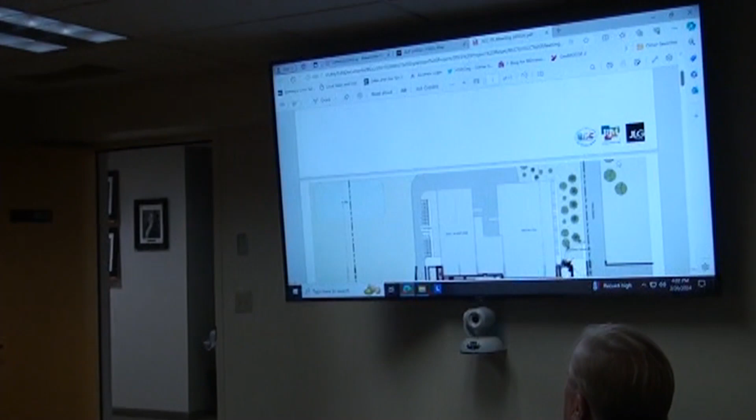Marty, is there a PDF you can scroll through? Okay, perfect. So the first thing we'll talk about is the site plan. Let's zoom out just a smidge here.

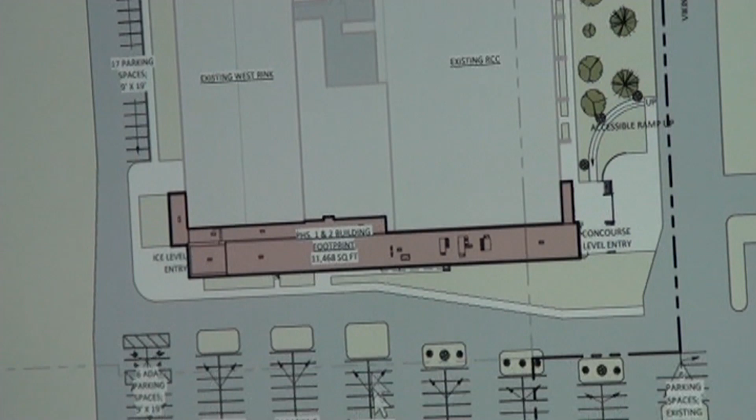So this is the extent of the site plan work that will be bid out in phase one. Previously, we were including all of the additional parking on this west side, which isn't really required by city code until we add the additional space of the third ice sheet. So we took a step back and said there's a lot of nice parking out there right now, it's in pretty good shape, and let's see if we can save some money or defer the cost of that additional parking to the future phase and retain as much of that parking that's there right now.

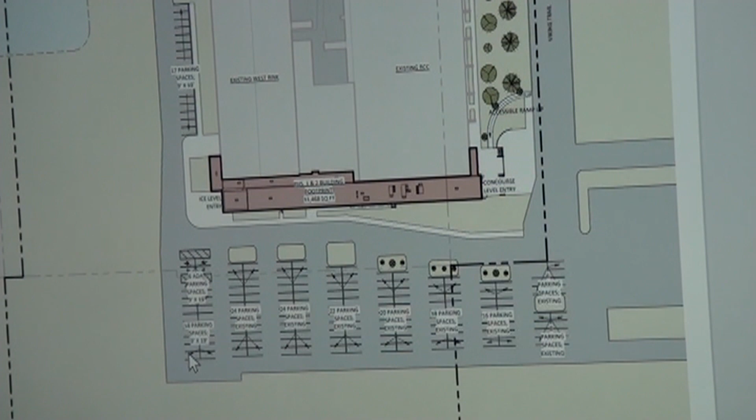So with that, some additional asphalt along the west side, some additional parking stalls over here. You can see the white is new sidewalk and site paving. And then there's some additional utilities that are going to be addressed with this.

We are going to loop in the water main, so we'll get that full loop completed. And then we also need to build out the whole stormwater retention basin to its size for the full build out. In phase one, just sequentially with construction, that makes a lot more sense.

So that parking on the left side up there, Vinny, that's all storage stuff there now, isn't it? Yeah. So you can see it is held off the building a little ways.

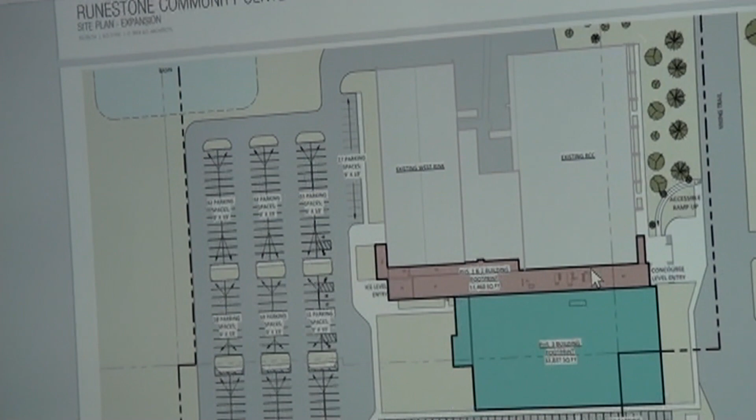When I go to the full build-out site plan, Roger, you can see here's kind of the full build-out, and I'll point out this hasn't been updated since the land swap has more or less been finalized. We have a layout that runs the parking aisles east-west and supports people coming in from the west off of 82. With that storage stuff, they have to find a different place to put that all then, or is?

Yeah, so one of the things we're doing is leaving some buffer space up here in this corner where you could build out large storage facilities in the future. Something like 2,000 square feet, a couple overhead doors, so his crew can keep stuff tucked away and not have to sit out there.

So that's kind of the long-term picture. But here you can see the phase 3 piece coming in the future, and then at that time we'd revise that south parking, and this would be the full build out.

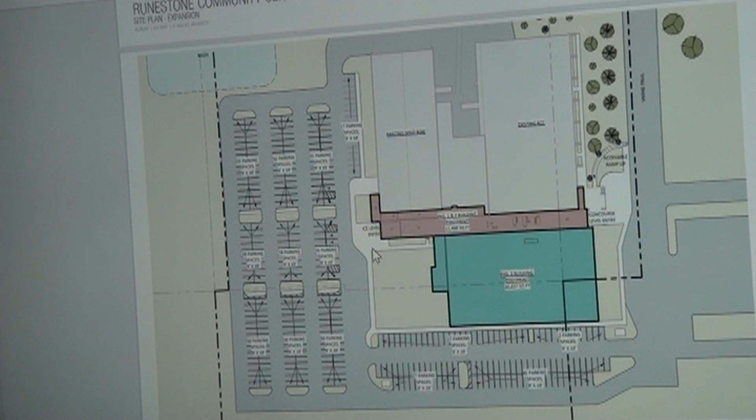How big does the stormwater retention pond have to be? Off the top of my head, I don't know the answer to that — it's civil engineering, they get into the nitty gritty. It just looks like the size of an outdoor rink. Yeah, just saying. The other thing too, I don't believe it's intended to be a wet pond. Like what's out there now, it'll detain that water when the rain event comes, and it'll slowly discharge and help control the rate of discharge.

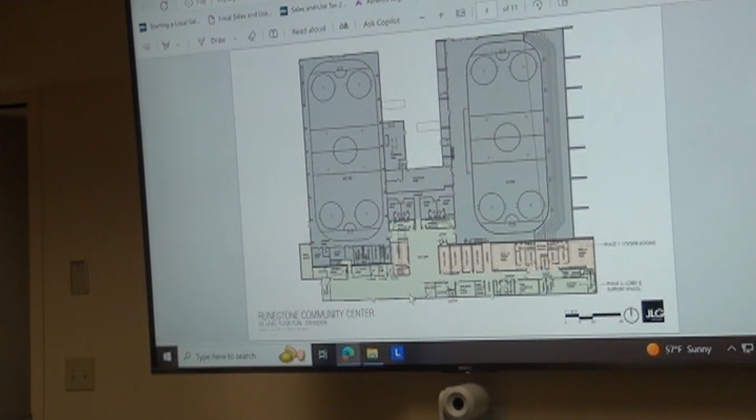So that's the extent of the site, and then when we get to the building, overall the general layout is still as it has been, with the main entry to the west.

Zoom that in a little bit, just focus on that. Oh yeah, yep, that's a good point, Marty. Yeah, we can dial this in here.

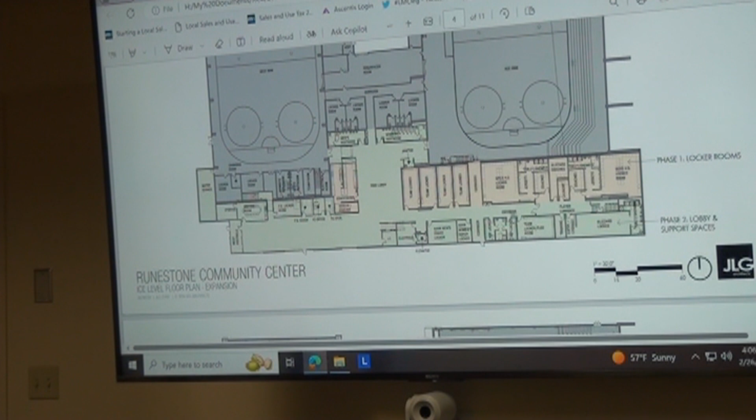So, main entry to the west, renovated locker rooms underneath that existing RCC concourse, and then the new expanded locker room in the corridor, the new lobby space, new concessions, space for figure skating.

But a couple of highlights on this plan in terms of things that have changed. Initially we were doing a lot of renovation work on the south end of the west rink, and we basically pulled that out of the project. We said there's bathrooms there, they're functioning, and there's significant dollars we can save by pulling that out. That's something that could get new finishes down the road after this work is complete, and it wouldn't really have a significant impact necessarily.

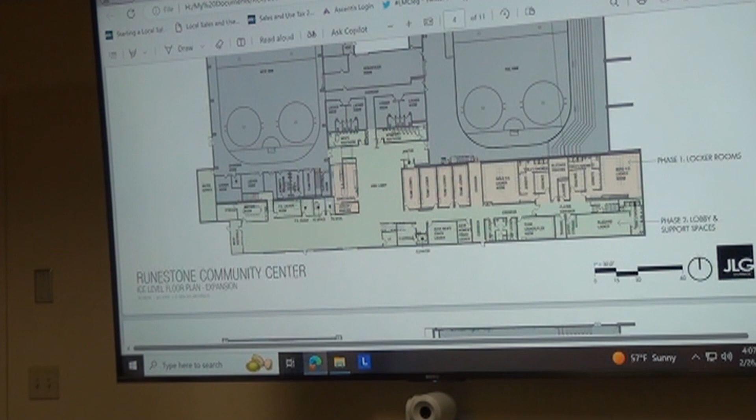But we are including the renovation and expansion of those existing lobby bathrooms. With the new lobby, those are going to be used quite heavily. In their current state they need some attention, as well as expanding. We are setting this up to support users when that third rink comes online in terms of the quantity of building occupants, so we are increasing the number of stalls with this work.

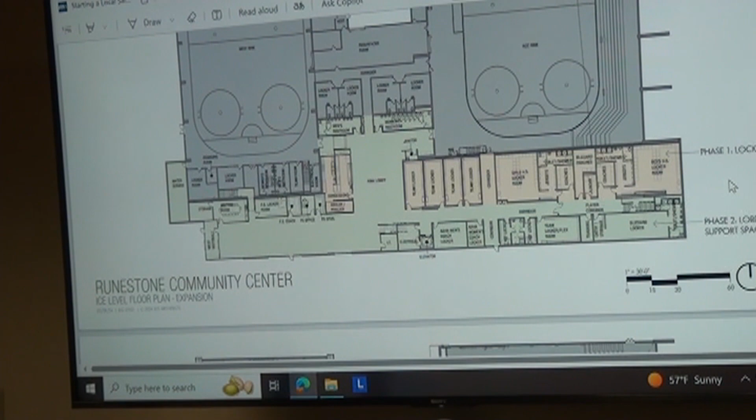Any questions on this level? You want to talk a little bit about the new service room on the west side, and the meeting room relocation that was done? Yeah, so the first thing, as I've already mentioned, was a new water service room over on this west end. Right now the water and the electric come into the RCC somewhere in this vicinity.

We really can't leave those utilities locked within the center of the building. You want those on an outside wall. If anything happens in the future, you've got access to those. That's really where they should be located.

So as we loop that water main around the building back to 82, we're creating a new water service room over on this west end. That'll bring a new water service, sprinkler riser, all that good stuff, and then that'll backfeed all the existing plumbing that's staying in the building. It'll feed the new plumbing, if you will.

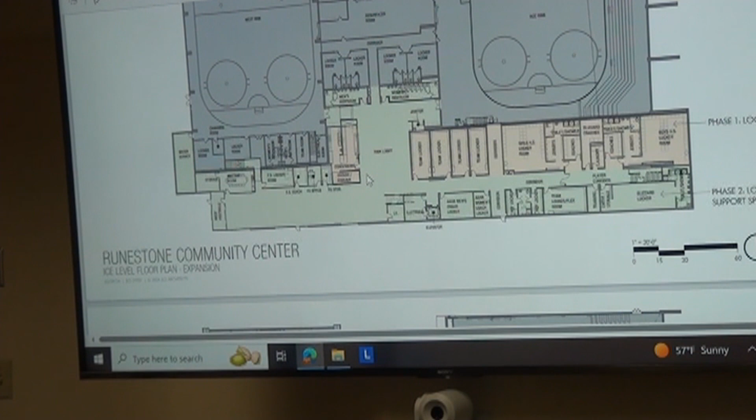When I get to the second floor, you'll see where we had some additional renovations on the RCC side at that concourse level. We pulled scope out of there, and part of that was getting some meeting room space in down on this main level near the entry. So if there's groups with the city that need to meet out there with Vinny and staff, they can use that. That could be a tournament or event headquarters, a dry land event, food show. People check in there. It's really a multi-purpose room that can serve a lot of functions.

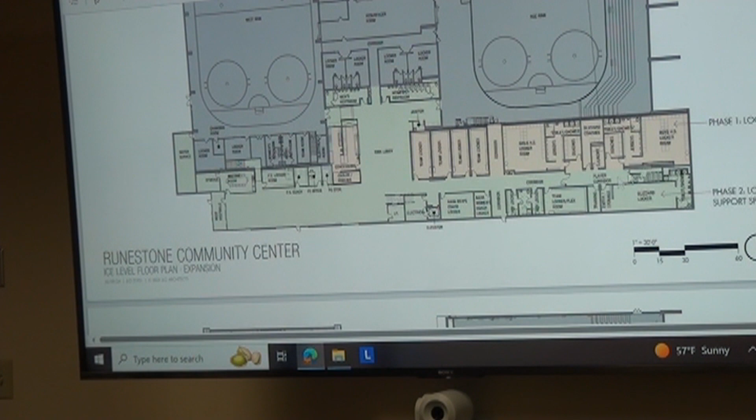And we did add a nice storage room to that, so it allows you to be flexible with furniture changeout if you want rows of chairs versus tables and chairs. Gives you some flexibility. So that area then, if we're not gonna fix those bathrooms and that...

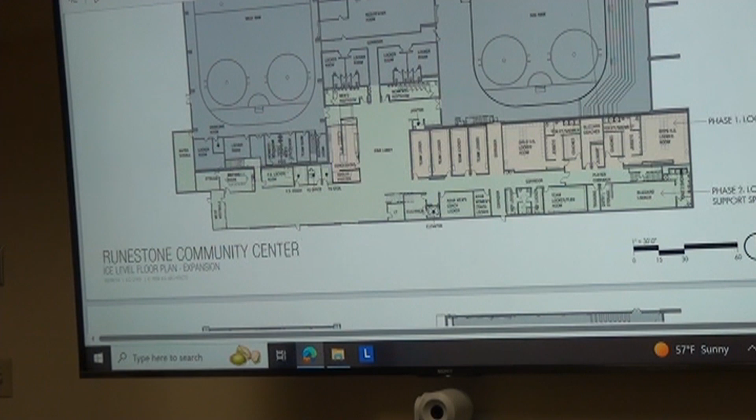Is it gonna be a wash doing it now or later? We're not doubling the cost to do it later? I would agree with that. I don't know if I'd say no additional cost. It's always gonna cost more in the future, right? But with bringing the water over here, you're not gonna be tearing up new work to do those enhancements in the future. That's some of the push and pulls we have to do because of budget.

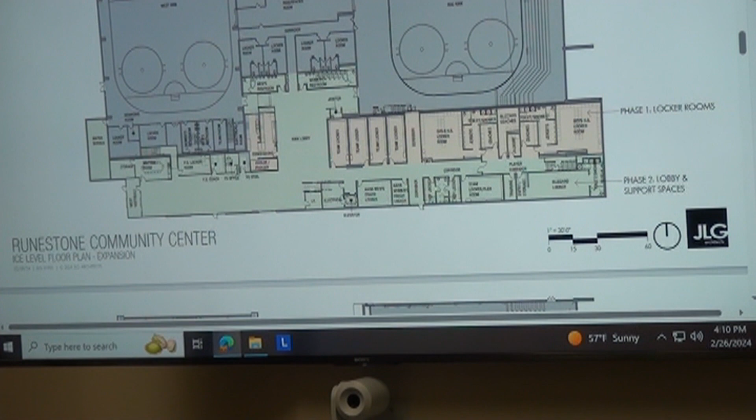And comment out, maybe - I don't want to say this wrong - by adding the toilet space and the fixtures in the lobby bathrooms, we're setting it up so when we do add phase 3, we don't have to add additional bathrooms. Our counts will still be okay.

So the bathrooms in the west rink and in the main level of the RCC that we're not going to touch now, we're not going to be triggered to be forced to do them in the future. It can be at a time whenever the city decides you need to get them done. As we went through this process, the team just said we don't have to do these, and if we're trying to save scope and save dollars, let's pull those out.

So we don't need that for the count? No, correct. The lobby bathrooms will still be there, still function, and go toward the count. But those lobby ones will have a significant increase in the number of fixtures, and that will be the main one that gets used.

The other big move here is really, if you look at it, we eliminated the work in the existing west rink and in the upper level, so we don't have piecemeal stuff all around the building. Psychologically, as contractors bid it, they see their scope of work is in one area, and you tend to get better pricing because they're not worried about the what-ifs over these one-off little remodels and where they're going to get burned. So I think it makes sense from that standpoint, keeping the project clean for the bid.

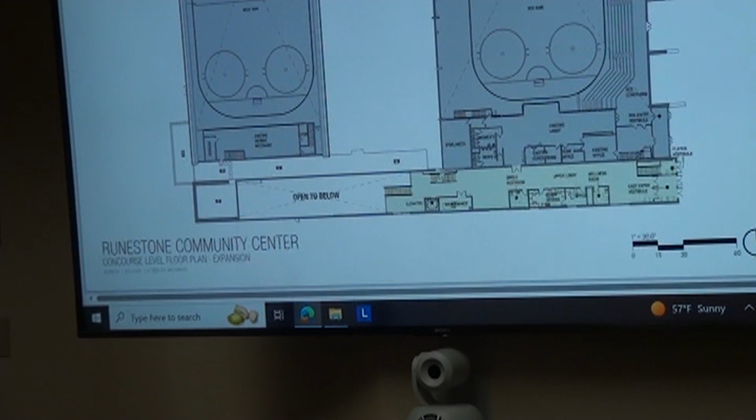So if we move to the concourse level, like Marty was just mentioning, originally at the previous design development phase, we had a bunch of renovation work happening in here. We were making these 2 bathrooms into 4 bathrooms, putting in a meeting room over here, and doing a bunch of new finishes and other renovation work.

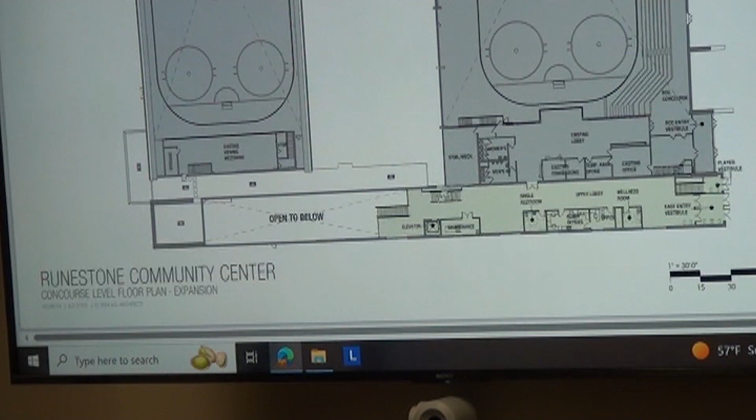So that scope has been pulled out, but our team and engineers are putting in the necessary infrastructure, so if you did want to do that in the future, you'll be able to. The size of the plumbing piping coming to feed these bathrooms will be sized so you could put those 4 back in there without tearing a bunch of stuff off. Same with the HVAC side, the air handling - we've been trying to plan that and set you guys up, so you're not going to rip out a bunch of new work if you want to do that.

Before, we had a large open circulation space in here, and we revisited that and said let's put that meeting room down by the entry, so we've got some space here we could program out.

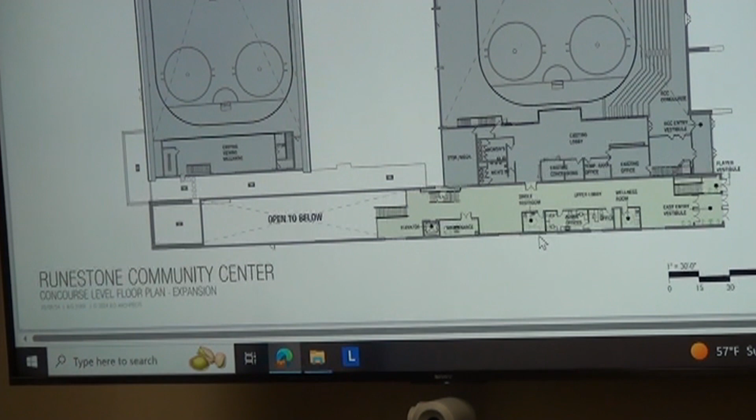So we've got Vinny and his team staff offices in this location, a single user restroom that's code required, admin offices, and the rink manager's office. Then we've got a mother's or wellness room, for all the different needs people might have to be away from lots of activity and noise, which we all know about if you've been out there, like last weekend there was a lot of activity.

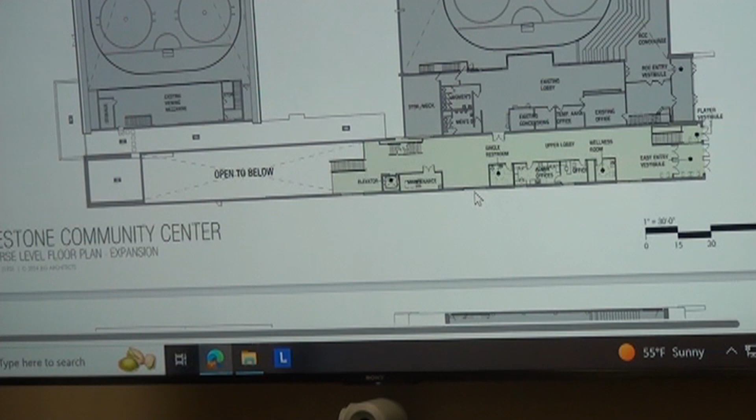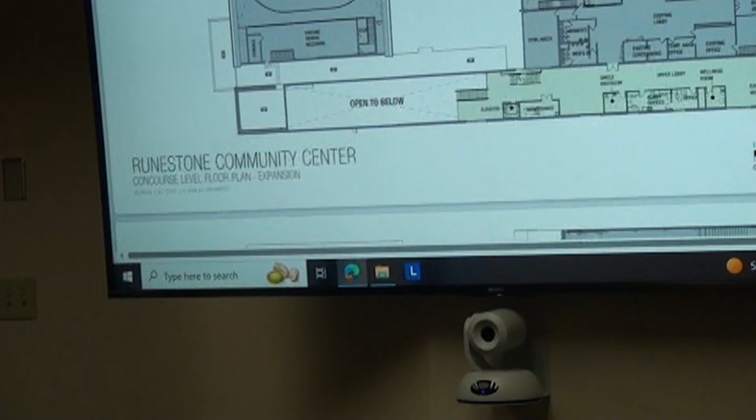That's the concourse level, open to below to the lower entry. In the previous design development, when this was being designed to meet B3, we had a completely different air handling, heating, ventilation, and cooling system, with mechanical rooms on this end and on this end on the upper floors. With the cost savings of removing that, we were able to go to a much more economical heating and cooling system that didn't need equipment indoors, so we were able to pull some space out of the building and reduce the envelope.

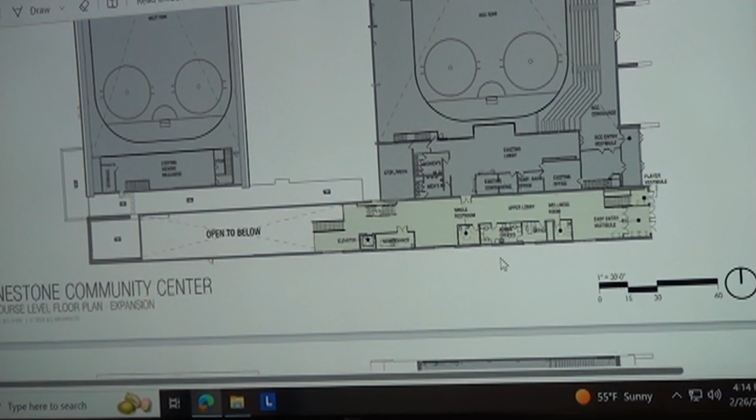If we go to the next plan, this would be the uppermost mezzanine level. You can see the stairs as they work their way up from the ice level, and then we've got the new elevator that would go from the ice level up to this highest level. This whole area is about 4,200 to 4,600 square feet.

We are bidding that as an alternate bid to the contractors, so the base bid will not include that floor or its finishes. That seemed like something where, if push comes to shove and we really need to hit a number, we get a price on that piece and you can take it or leave it on bid day.

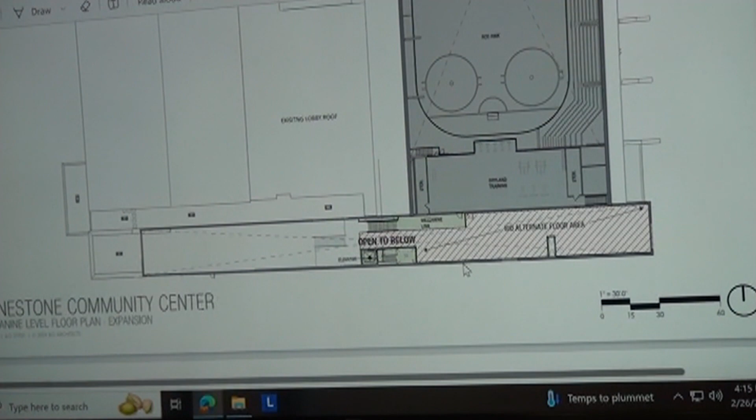What would be there if you don't put it in? Great question. If that wouldn't go in, this would all just be open two-story height. But the elevator would be stubbed out up to that third floor, and the structural members that would support that floor would also go in. So it would be a matter of coming in and adding the floor deck, concrete, and finishes in the future if you wanted to add that back in.

So we're trying to have some levers to pull to help control costs and give you options. As we looked at this, that mass is being built anyways all the way up to the top. As the team looked at it, and as Adam noted, thinking of the potential programming in the future we've talked about for health and wellness, if the bids are great and we can do the alternate, fantastic. If not, we're in position in the future to almost double that dry land training area that's up there now, with different possibilities to use space we're already building.

So what would be the intent of us using that if we do put it there? Right now there's a couple of shooting bays up there and some very primitive cardio and weight equipment. There are a few options: you can upgrade that area for dryland training, for shooting, or for a group of figure skaters to go up there to stretch or whatever it may be. You could potentially move more weights in there. There's been some discussion about physical therapy in the future, perhaps leased out space.

Once you have an elevator in there, this could be a potential for that as well. Way back when, we had that phase 4 that could be meeting rooms on the lower level and a wellness area on the second level. If you build this entire thing out and visualize it as a wide open space, you maybe can accomplish everything you need in the future without the additional space you'd have to contemplate, which is brand new two-level square footage.

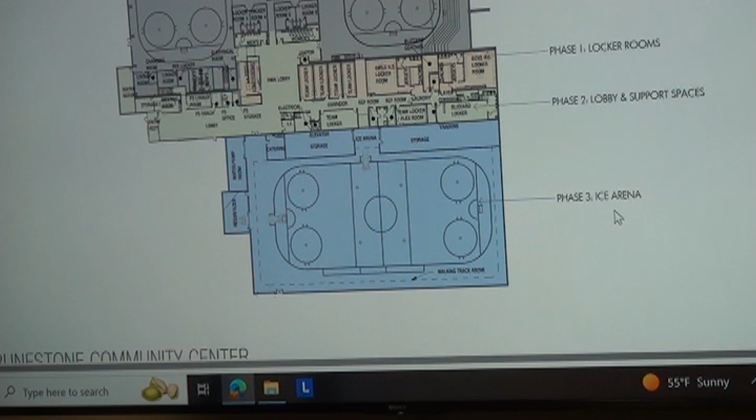Let's see here, and then we can include the preliminary plan for the phase 3 ice piece. We were about 30-40% through design development on this one when we got the budget for phase 1 and 2. So we've kind of put this on hold, and once 1 and 2 get out to bid, our team is going to shift focus back to this component and take it through the rest of design development.

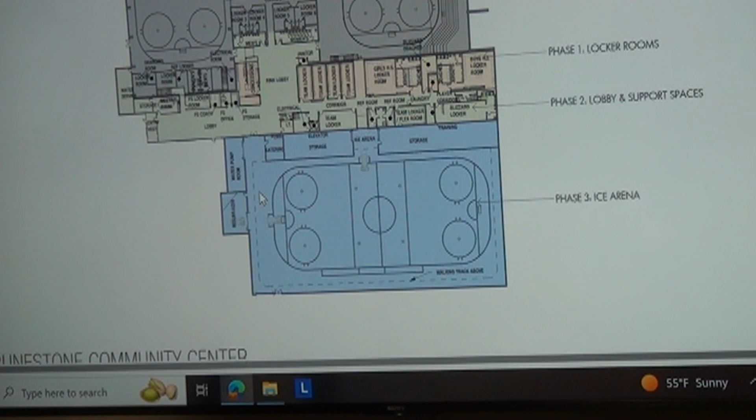We've done a little bit of work looking at - like Marty said - with some of the shifts we made in phase 1 and 2, we don't anticipate the need for that big phase 4, which allows some opportunity to get a resurfacing room in a better location right off the end of the ice sheet. We're also anticipating, with using state funding and needing to meet B3 requirements, having a pump room, and still likely having a geothermal system on site along with some other renewables and energy-conscious decisions.

If you're going to do geothermal, it's got to come one way or the other around that building, off from 82. So right now the anticipation is that there'd likely be a well field to the west.

So you're anticipating putting a well field in versus working with AOP? Correct - I think generally the requirements ask for on-site strategies. I'm not sure if we can borrow and swap, or what you're getting at. Well, AOP is an entity of the city. Right, but it specifically says on-site. Well, it's coming up - but even where we're at today, we did have a preliminary scoping study done by a third party that specializes in geothermal design.

That came back very favorable - there are likely 2 or 3 different systems we could put in there with varying degrees in the number of wells and the depth of wells. So as we wrap this up and pick back up on phase 3, we're going to be digging into that.

So does this fall under a scenario where you'd have to go for a variance to put the well in? The wells - AOP isn't going to allow any wells to go in. There's a lot to unpack. Yep, there's a lot to unpack.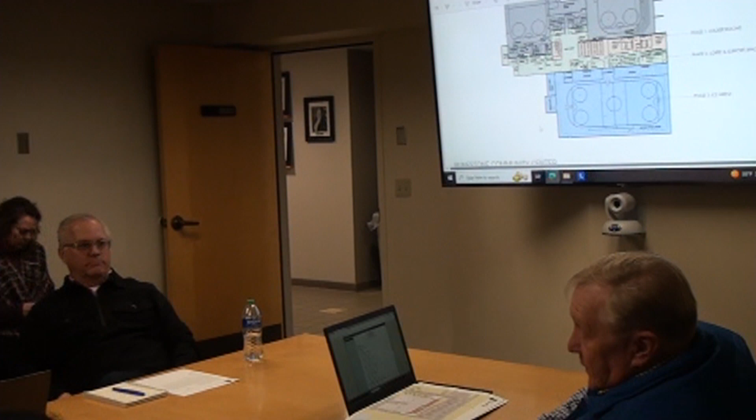We're going to have conversations when we get into after the first round. My thought is, you're talking to the west of the old rink there, that's where the parking's going, so then you're gonna be beyond that. But generally they can be within a parking field, so they can pop up in an island. That's what we're doing a lot, integrating them right into the parking, because obviously if they're closer to the building, they're more economical - it's less piping.

There was some recognition of that even in the study we got back - it noted this system might be more economical because of X, Y, and Z. We kind of dropped focusing on this.

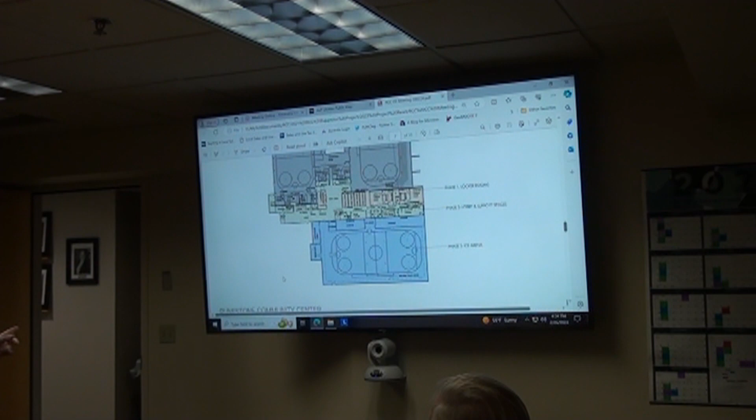That little yellowish area is the existing locker rooms, in the green area. It's one of the more complicated pieces we're working on across the office. It's complex because we're trying to connect so many multiple levels, so many building types, dealing with drifting load and snow loads. There's more packed into that little rectangle than any other project in our office right now.

If we go like we're doing this year, you shouldn't have to worry about snow loads. Yeah, right, if that's the future for us. Yeah, exactly, exactly.

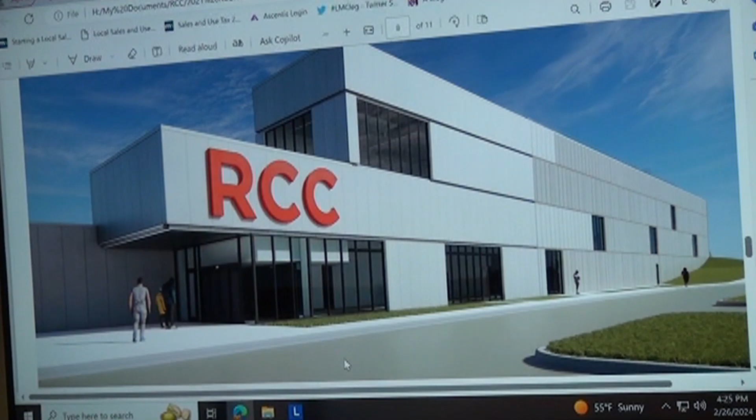So then we've done some updates to the exterior. One of the things we talked about revising the last couple months was doing this wall out of precast concrete to try and set up some efficiencies with that future phase 3. That box was going to be a precast concrete wall panel box, so we've been working with our structural engineers to incorporate that. You can kind of see the line where that system changes, but the idea is these metal panels would integrate and make the building, that big chunk, read as one integrated thing versus just having a very blunt line there.

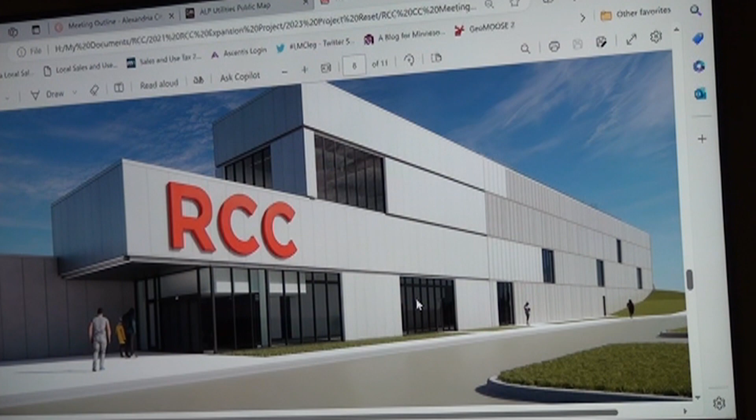So that would be the entry on the west there, and if you step back a bit, you can see that in the west rink in the background. This is that new water room, and the new entry, some opportunity for signage, and these windows are strategically located where we need openings in phase 3. These two here would be for loading the bleachers, the spectator seats, in that future phase. So a lot of this is driven by planning for phase 3.

Good. Okay, that's kind of the high-level design update.

Let's look at the schedule here. In pre-construction, I touched on a little bit of this with where we're at - we're in that last week of February, wrapping up construction documents. We had a meeting a couple weeks ago with a really good turnout of local contractors to show them the current design and try to garner any interest for potential in-kind donations.

As we'd like to ideally have an idea of what that could entail around March 1st. We had 20 plus people covering 8, 9 different trades, so we were really pleased with that. And as Marty mentioned, March 11th is when we'd be looking to the council to authorize going out for bidding.

So RJM looked at 2 scenarios. One had the locker rooms happening earlier in the process, but that was going to require temporary facilities, temporary storage, potentially building temporary locker rooms. Vinny has been working closely with RJM working through this, and I think this looks like it'll be the most economical, because there's probably less temporary facilities. The overall schedule maybe 4 weeks it could add, but probably a net win for the city.

So I don't know, Vinny, if you want to add anything, or Marty, on that piece. Well, I guess the building is self-contained, so we have to have a complete electrical movement, and we'd have to run additional or temporary power. This way we just stay as we are - heating, air conditioning all stays the same.

Everything would stay the same until we get into it, and that would give contractors an opportunity to establish a new electrical room, plus they'd be able to establish the heat, ready to go. Otherwise I don't know how they're gonna manage that. At first I didn't really like it a lot, but then the more I started thinking about it - we are self-contained, so everything that's there we need, we're gonna use, and we get the new stuff built, and then we can do the switch over. I mean the power, I don't know what that would take today.

Short duration versus having temporary versus power running, and then a couple locker rooms are gonna have to be out the back end of the building. I don't know how much... Tom, do you know how many you can fit a team in? What do you need, 2 for each team? Yeah, so we need 6.

Temporary, that's gonna be a heck - I mean, they're not gonna give them out expense and free. We've done it before, but I think we have an opportunity here not to. And then also what I think about is procurement. I don't care what anyone says, it's still an issue. So this also allows some of that procurement on the HVAC equipment and some of that stuff to be better set, so when they're ready next summer, they can just go and build.